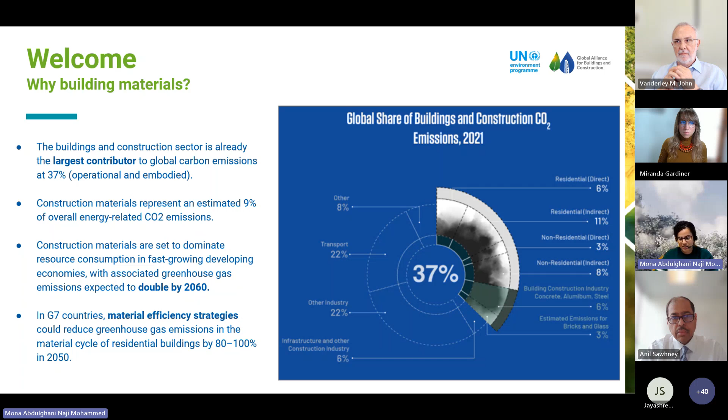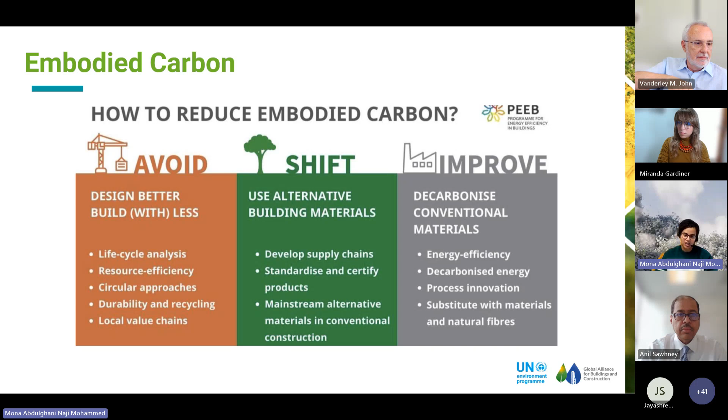So in GlobalABC, we work on considering embodied carbon in these building decisions, and we look at that through an avoid, shift, improve framework. Avoid focuses on reducing construction work, either building with fewer materials or re-envisioning the use of buildings and rehabilitating them so that we don't need to construct new ones. We also look at shifting to alternative building materials. And finally, we look at improving and decarbonizing current conventional materials. So the mission of the Materials Hub is knowledge generation, dissemination, and implementation to apply this avoid, shift, improve framework.

We were brought here originally with the climate intention to reduce emissions, but we're now looking beyond that at how we are engaging with people. So looking at healthy, sustainable net zero buildings, as well as socioeconomic and biodiversity considerations, such as job creation and business opportunities, and of course, preserving the integrity of biodiversity.

And the objectives of the hub run around the aims of the GlobalABC, where we strive to shape a common vision for the stakeholders, work on advocacy and synergy, and develop and pilot different tools that enable different actors to overcome these barriers, as well as linking to global agendas such as the Paris Agreement and the SDGs. And finally, we facilitate the exchange of best practices and innovative ideas, looking at the education aspect.

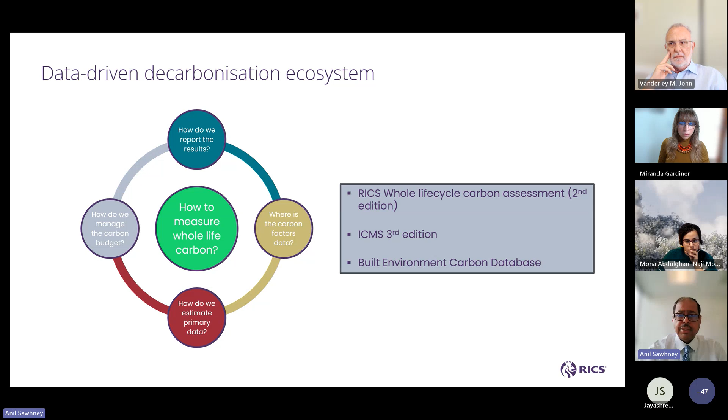Within the decarbonization pillar or theme, we are contributing to the creation of a methodology for measuring whole life carbon through our Whole Life Carbon Assessment second edition. We are providing a schema through a global coalition of about 50 professional bodies on how to report the results of assessments using an agreed taxonomy that includes cost and carbon reporting through ICMS third edition. We are also helping the data ecosystem by creating the built environment carbon database that has lots of information needed for assessments.

So in the context of today's webinar, here are my brief views. The data ecosystem that we are talking about today, in my view, consists of 3 buckets. The first bucket is directed towards primary data, data that is directly estimated and measured from your project or asset for which you are doing the assessment.

Here, we should provide best practices and guidelines to assessors, especially, for example, quantity surveyors and cost managers getting involved in the estimation of bill of materials, transport factors or transport numbers, waste factors, energy models, and so on. We would like to promote a model-based approach so that primary data is extracted from building information models.

The second bucket is the secondary data. This is also called the background data for assessment. These are your national carbon factors, carbon conversion factors, perhaps EPDs, PCRs, and other sources of information such as energy grid decarbonization factors, material decarbonization factors. Extremely crucial. These are industry-wide, generally at a national or regional scale, and assessors dip into this to do the assessment. So it's a very important bucket within the data ecosystem.

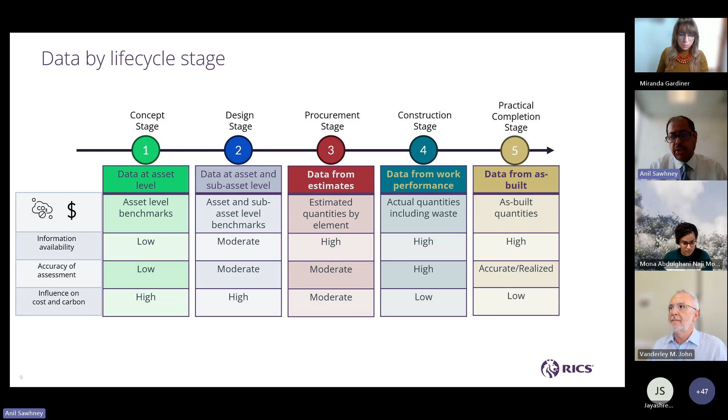So it is a very similar evolution to the cost workflows, where you initially have high-level benchmarks, but as you go into the project life cycle, you have detailed bottom-up information that's needed.

We already have very strong global ecosystems. So, for example, EPDs can be now digitally produced. Open EPD, a format produced by Building Transparency, openly available and shared, can be further supported through this governance and standards ecosystem, where you have interconnected data dictionaries through ISO 23386.

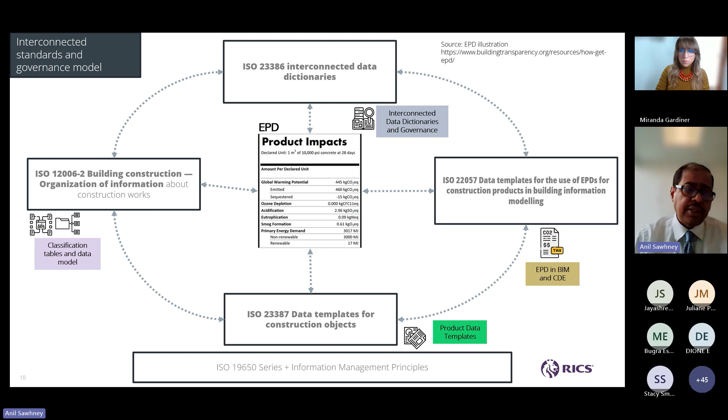You have data templates or product data templates from 23387, and guidance on 22057 and how to use EPDs within a BIM kind of framework, all supported by the ISO 19650 series of BIM standards. And then you have your information classification standards, the ISO 12006 series of standards also.

Within RICS, currently in the UK context, we have an open, freely available to the public built environment carbon database, which is our way of sharing the information and the data that we have. This database has two libraries.

We have a product library and an asset level library, which can be used by assessors to not only receive inputs, but we are also requesting folks using BECD to report back their assessments so that we can, on an ongoing basis, continue to improve the BECD benchmarks and also continually enhance the product library.

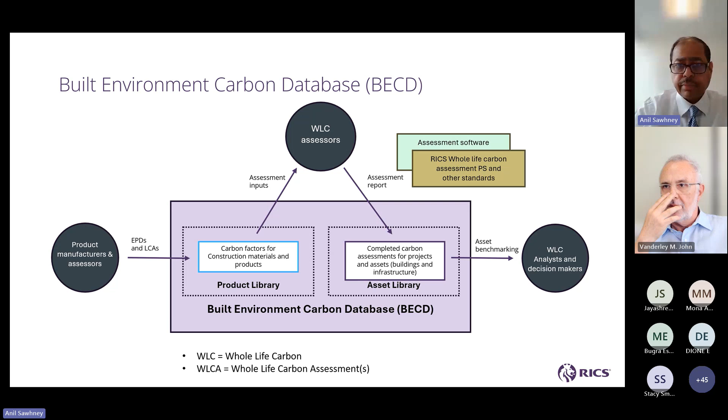So that's pretty much what I wanted to share. Hopefully this helps provide some context.

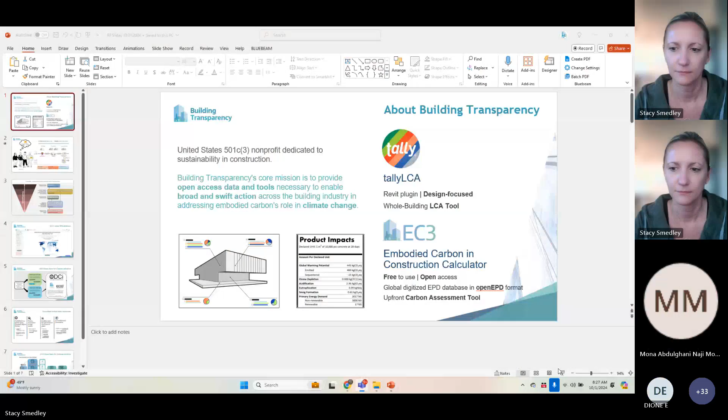And I now request Stacy to share her opening statement. I know you have some slides that you would like to share. Just get it into slideshow mode.

Great. So thanks, everyone. It's so great to be here with this panel this morning, talking about one of my favorite things and something that Building Transparency is focused on. Just a little bit of background on Building Transparency. If you don't know us, we are a US-based 501c3 nonprofit with a mission of providing the free open access data and tools needed to really decarbonize the built environment in the construction sector.

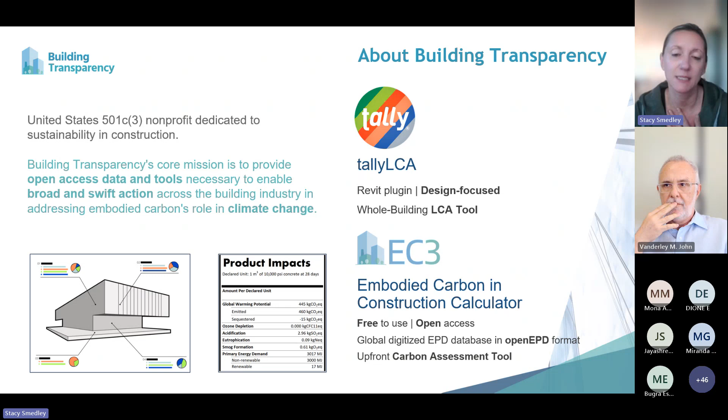And we do that with two tools that we offer. Anil mentioned our Embodied Carbon in Construction Calculator, EC3, which is a free open access tool and database of environmental product declarations. And then we also were gifted Tally LCA, which is a whole building life cycle assessment tool based in Revit. So in our world, something that's particularly important to us, providing tools and data, is that we look at the data and we ensure that we have what we need to support everyone.

And I really like to put this into context just for one second. We support now about 55,000 users in over 78 countries with the data and tools that we offer in the embodied carbon world. And it's really obvious that whether you're an owner setting policies, a policymaker at a federal or a local government, architects, engineers, or contractors that must meet policies, or the manufacturers that are trying to comply, we need to have two different types of data to really service this work.

We need generic material data sets that can be used to look at averages and benchmarks and fill gaps in specific data that we are not currently supporting or we don't have in certain regions. And then, of course, we need the product-specific data sets and the upstream data that allows us to actually realize and account for what we did.

And I will share these slides. There's a lot of information on them. I know we have to go fast this morning. But really to just level set, this is all hands on deck. We all need this data for various purposes at various stages, and that data needs to be consistent.

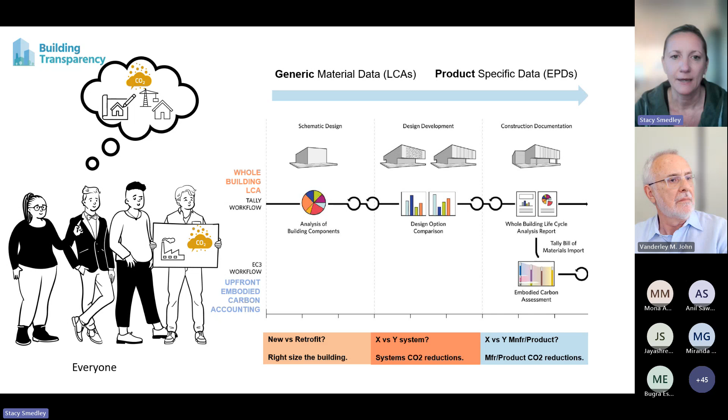This is my attempt at really showing how uncertainty currently applies when we look at every step of the data process, starting with the upstream process data where we're getting unit process emission factors from databases like EcoInvent or GABI, that then flow into LCA platforms that may have different ways of aggregating that data or leveraging different data sets as their underlying calculation factors that enable life cycle assessments that then push out databases of these generic material LCAs, and also then push into meeting product category rule requirements where those LCAs are verified into EPDs and into the databases that support that. So as we go up that process, currently the uncertainty does grow because there is lack of alignment and harmonization really at every step of that kind of calculation workflow.

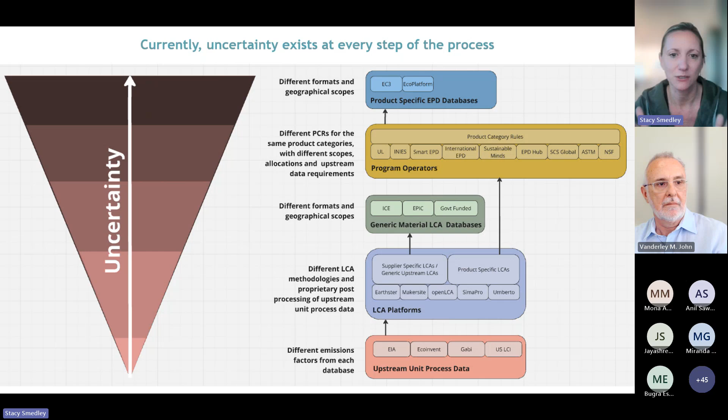The one thing I will say, which I adamantly believe, and is kind of our ethos at Building Transparency, is we can't wait to address all of this uncertainty to act and to leverage the data as it currently exists. We just need to make sure that we are being transparent about the fact that uncertainty exists and work to address it as an ecosystem and a community.

The two types of data that we are supporting where we are trying to both daylight uncertainty and address it are in the EC3 tool. We have a database of over 180,000 digitally available environmental product declarations that we now pull in from every program operator in the world and every database that we can then go query to bring it into one format in one place. And so again, in our tool, this is how you could access it to use it in a free tool, but we have almost 10 platforms now, including Materials 2050, Tangible, Cove Tool, Sustainable Minds, Ecomedes, that are now all leveraging our database that's been standardized to provide product-specific information in their platforms. And that's very important to us.

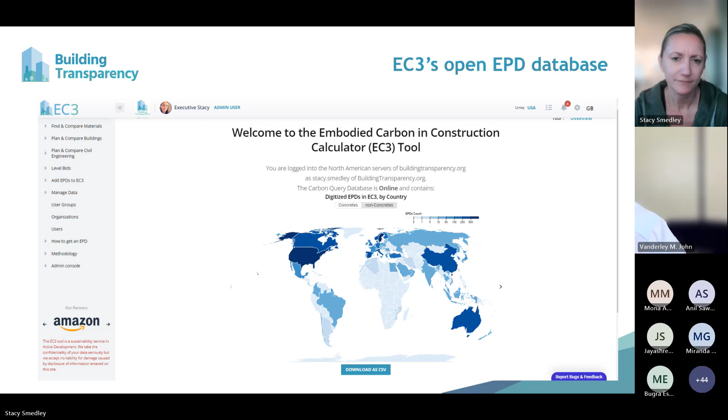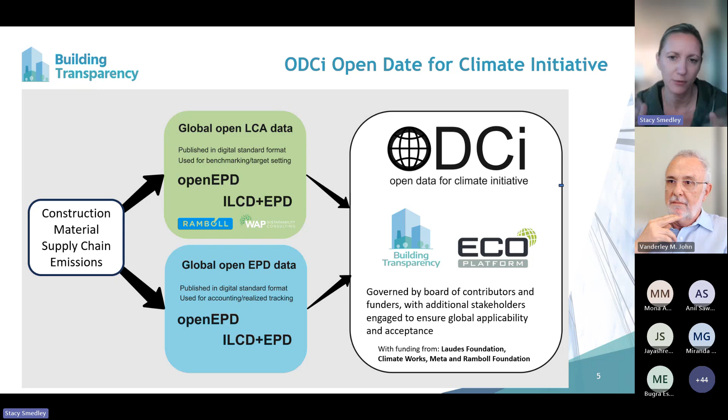The second is an initiative that we announced in February in Paris this year. And we are just getting ready to release the first data sets out of this project. It's called the Open Data for Climate Initiative. It's led by Building Transparency, managed by us, but in partnership with Eco Platform in Europe as our verification layer, and supported by Laudes Foundation, ClimateWorks, Meta, and Ramboll Foundation. And it is a harmonized methodology for providing global life cycle assessment generic data sets that are regionalized and provide ranges so that everyone can really start from the same collection of generic data to set benchmarks and move into product-specific data downstream. So there'll be more announcements on this as we publish this data.

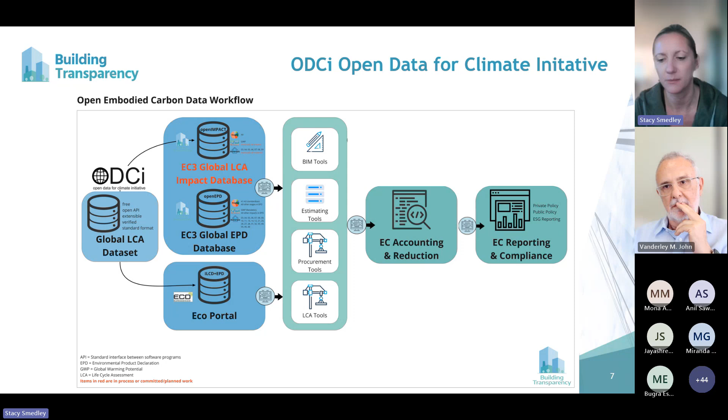I'm just going to skip that one. It will actually look at a workflow like this, where the data will go into both our API format and database available for free, as well as become available in the Eco Platform Eco Portal database that then allows any tool and reporting entity downstream to use that for accounting and compliance. So we're very excited about the progress we've made there.

And that's it, because I know we have to get to the next presentation and the Q&A. Thank you, Stacy. That was excellent. Miranda, would you like to go next and share your slides, please? Absolutely. I'm finding mute. Let me know. Can you all see this now? Perfect. Yes. Wonderful. Hi, everyone. Stacy, thanks for going first. Always good to follow such a wonderful leader and such a wonderful presentation.

As I mentioned, I'm Miranda Gardiner. I'm the executive director of the iMasons Climate Accord. And as Anil alluded to, this is a nonprofit focused in on carbon reductions in digital infrastructure, so primarily data centers. And to give some context on it, the foundation of it started to evolve in about 2021. We launched in April of 2022, but really looking at the responsibility that this sector, especially tech overall, has when it comes to climate change issues.

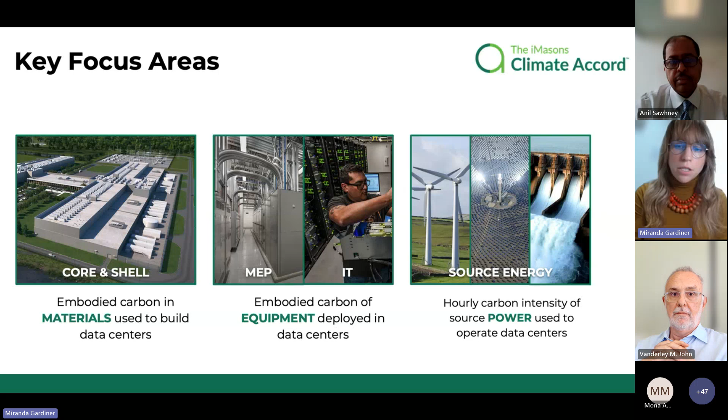Thanks, Miranda. I think you've taken the pretty difficult challenge of embodied carbon for MEP and IT equipment. We all know that that's something in the data center space that's absolutely important, but it's a pretty difficult task to get EPDs and other information for that kind of stuff.

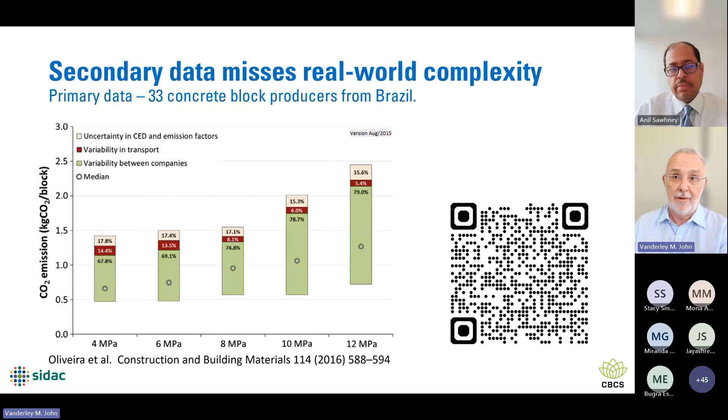What we did in Brazil, we have a new system, the sidac, that we developed. To make primary data, you need to demand less data. You cannot collect 3,000 flows for 1 year in a company to have primary data in all the supply chain. But you can do it if you put focus, for instance, what we did, CO2 and cumulative energy demand. This is what you measure. So we got like 3 orders of magnitude less data. That makes it possible to make decisions. That makes it possible to measure.

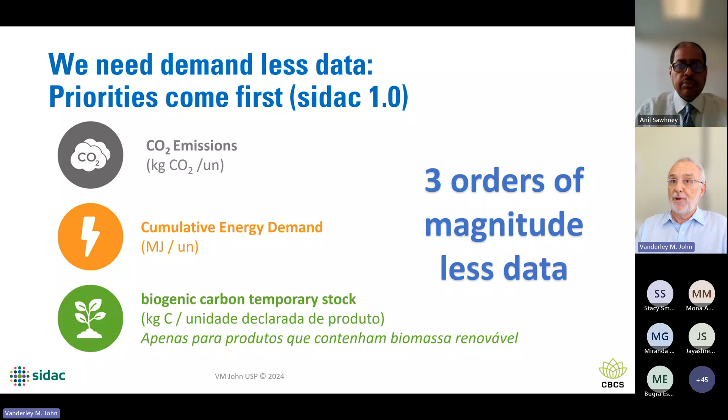So our system has many advantages. We have primary data that reflects mostly the companies. It's very easy to understand. There's no complicated indicator. Cheap and fast to deploy. SMEs can use it. Professionals can learn it.

We have a rule here that direct emissions, scope 1 and 2, must be primary data. You cannot outsource them. And that's possible with CO2 and energy, but not with other emissions. If you use secondary data, it's fine, you need it, but then the uncertainty, which I think Stacy showed very clearly is wide, must be explicit. So you have an uncertainty in your report, and it makes clear that your supply chain does not control CO2. And of course, we want to do better. So this is a system that will evolve with time, increasing in scope and increasing on the life cycle. So that's what we did. It's very, very simple, very easy to understand.

Why are we inventorying only CO2 and not CO2 equivalent? Because we are insisting on primary data. I cannot very easily do and verify a report on methane fugitive emissions in a plant. And so we are losing that. But this is for construction. We did this for concrete in Brazil.

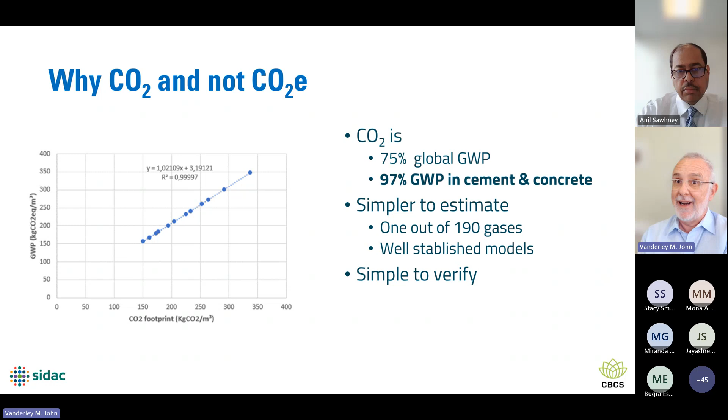Using EcoInvent, which is not our data, it's secondary data, between GWP and CO2 footprinting the difference is 3%. And CO2 is 75% of all GWP globally, and for construction it's more than 90% in Brazil. So we focus on the priority, and we got something very easy to do, very simple to verify, accessible to SMEs and everything else. So we are losing something, yeah, but we are gaining primary data, making decisions based on primary data. sidac is also fully digital. It's one place. We have an LCI database, data validation and auditing, and a digital EPD repository.

It is the unique, only digital repository from Brazil. IFC data exchange API, and then we have the inventory tools for the companies. So everything is in one single place. It's free to use. Of course, if you want to issue an EPD, there is a verification cost.

The second thing that we have to change, in my point of view, is that information is for decision making, not for reporting. So what we are trying to do here is set up a system where the primary data is used to inform designers and the people that buy stuff in construction companies in real time. So the idea is a benchmark-driven integrative design optimization. So that's how it's going to work.

So this is for buildings. We are focusing on structure. So in conceptual design, you do a primary structural analysis. The software sends the quantitative data to a benchmark API that collects the CO2 from sidac and sends back in real time to the structural designer not only the CO2 footprint range, because there is an uncertainty.

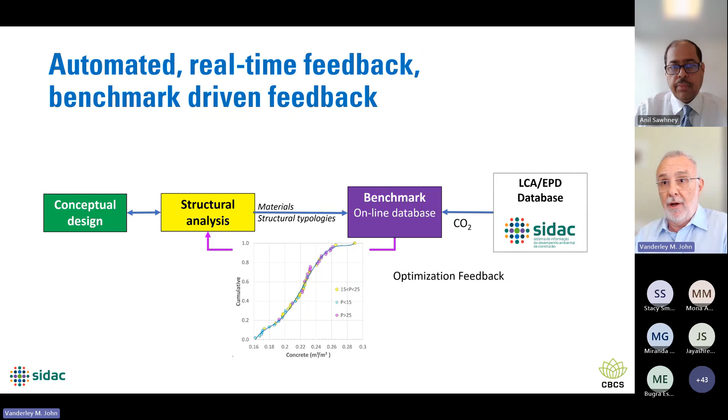Unless we do that, just reporting after the design is complete or the construction is done, doing the calculation does not mitigate. This is just reporting. Of course, in the long term, it will help do some mitigation, but we don't have lots of time to do that. This is much, much faster.

So we did a study on the CO2 footprint of embodied carbon on building structures in Brazil. We have two cumulative distribution curves. One is when you use the cleaner materials from the market, and the other the dirty ones. And you see how big the difference is between different buildings. So there's a lot to be achieved on embodied carbon mitigation in structures. Structures are probably 70% of our embodied carbon, at least in Brazil.

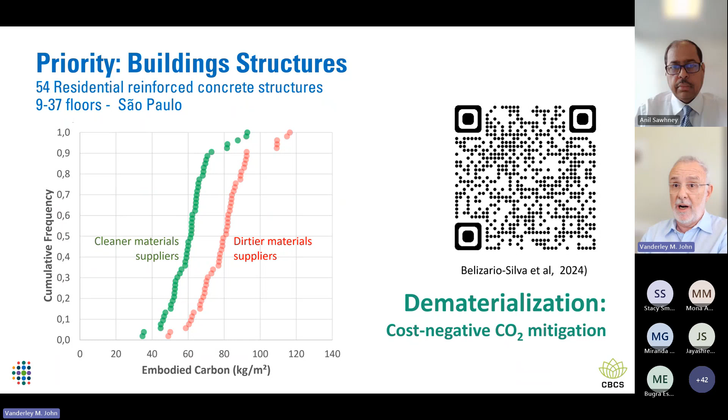We are also interested in having this global open standard that Anil mentioned. So we are part of the GBDI network. We are working to have this in a global standard to allow comparisons between, for instance, the ACI design code and the CEB European FIB design codes, and see what is the most efficient and how, and this allows us to learn.

These are the stakeholders for sidac. We have had support from the European Union, GIZ, but there are a lot of people involved from the Brazilian government, including industrial associations. If you want to see how it works, this paper describes the system. You can check it over here.

Lastly, I would like to say that in the developing world, a significant share of construction is not done by engineers or architects. It's done with different degrees of informality. In Brazil, probably 60% of the cement is sold in bags. Probably 55 is used by non-technical people. So if you want to reduce the embodied carbon in these buildings, we have to understand them.